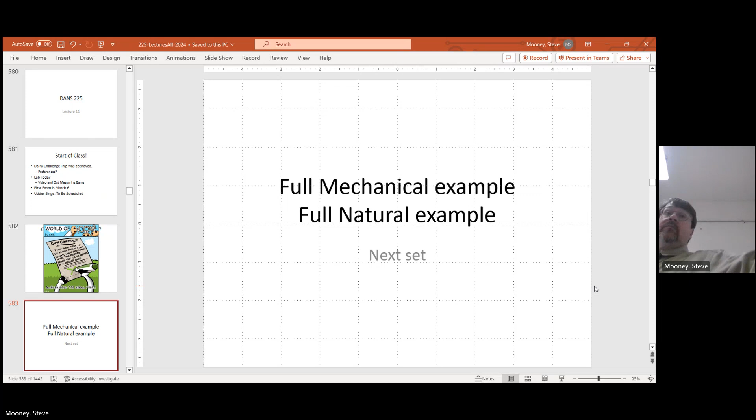So try it on your own and we'll see what we come up with. And I assume you're using your phone for calculators. If I turn it on. Yep.

Okay, we got a barn, mechanically ventilated, 100 feet long, 32 feet wide, and 8 foot high. Inside, a rectangular solid. You need to know what to do with it from there. So 100 feet long, 32 feet wide, 8 feet high. So basically steps 1, 2, 3, and 4.

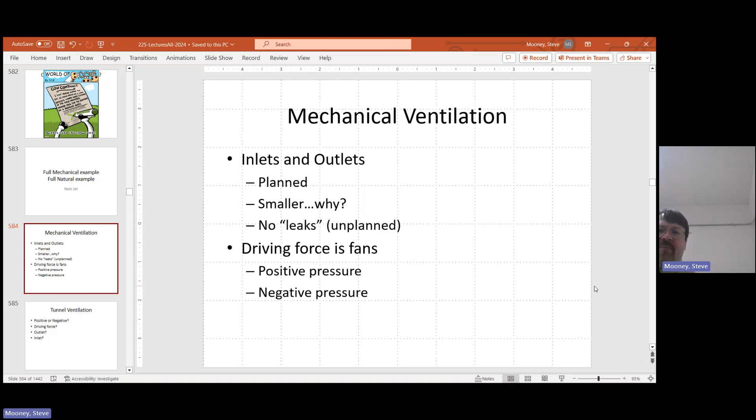So we're talking about mechanical ventilation. There's lots of different types. We start to play with things. So you got inlets and outlets. We want them planned, driving force fans. And we could either have a positive pressure system or a negative pressure system. We're gonna talk about tunnel ventilation.

Similar to cross ventilation, tunnel ventilation. Is that gonna be positive or negative? Anybody have a guess? So we're using fans to draw air all the way through the barn, starting at one end of the barn, and then drawing the air all the way through and going out the other end of the barn, usually on the long axis. So what is that gonna be? Gonna be negative. The fans are pushing air out.

Driving force is that pressure differential, the fans. So the outlet is what? Fans are the outlet. The inlet would be at the far end. And we open that up. Hopefully everything goes the way it's supposed to.

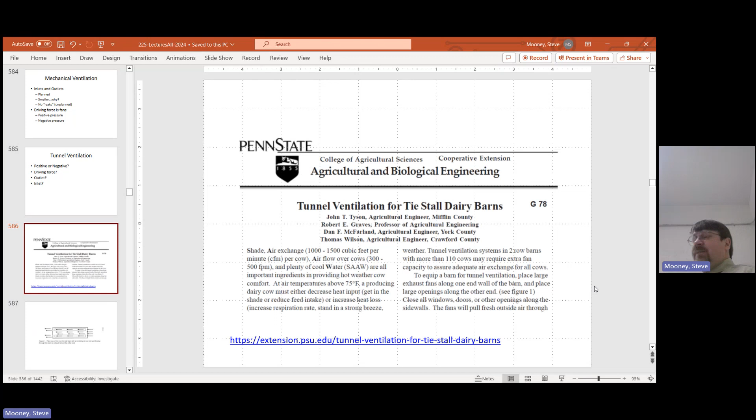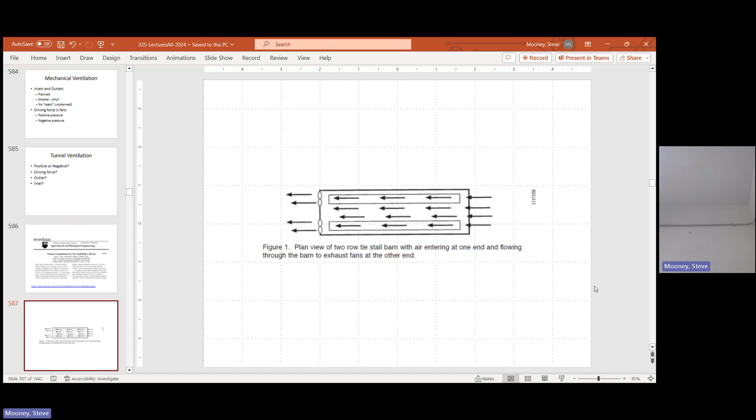You got fans on one end of the long axis of the barn. We got two fans there. They're gonna draw air from here, take the whole length and exhaust it out. So if that's gonna work, what do you have to have happen? So the straw has got to be sealed all the way down. So anybody tried to drink from a holey straw? It requires a little bit more effort. So you need a seal all the way down. And that could be a challenge, especially in older barns.

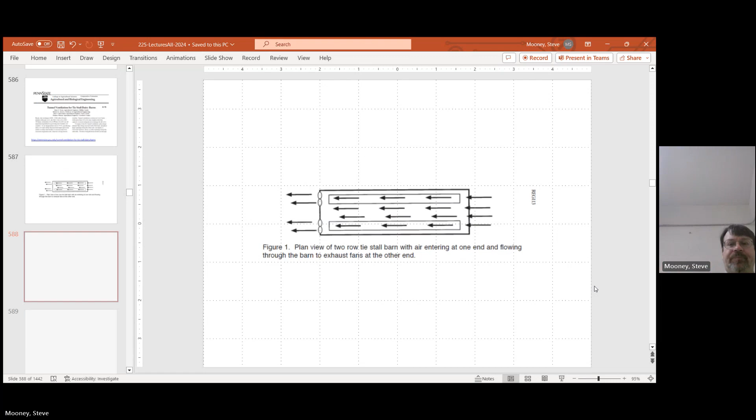So you've got the exhaust fans, especially down south, you've got lots of them. You've got some sort of inlet area, and we want that inlet area to be dispersed across the whole barn, so the air for the entire barn moves. We don't have any dead spots. If we focus the inlet just to the middle, we get dead spots in the corners. We want the whole inlet to kind of sweep through and get to those exhaust fans at the other end.

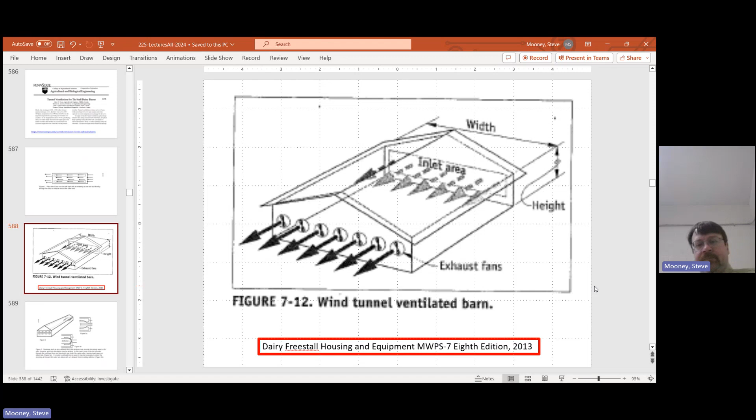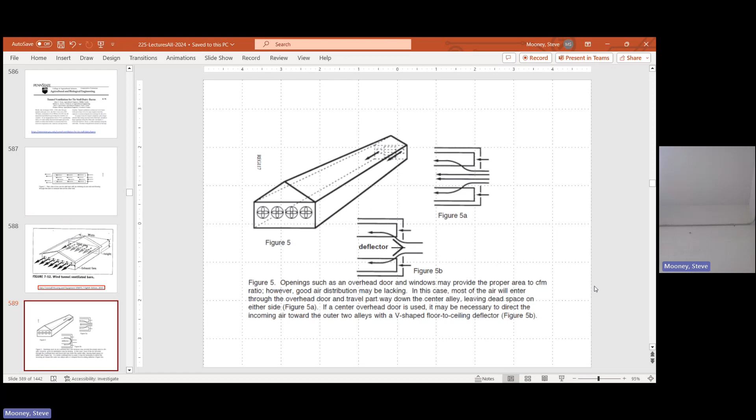So what happens if we've got some sort of building where we can't spread those inlets around the whole end of the barn? Maybe we got cinder blocks or something on an older barn and we can't really get rid of them or open them up as easily as we might a wood structure. So we need some sort of deflector to move air here.

Our main opening is here. We've got a little opening. Most of the air is going to come in, and you're going to potentially have dead spots in the corner. You're going to have a lot of air down the alleyway. You want, at least in the barn I grew up with, the rows the cows were facing out, we want some air going across their noses, so they're breathing fresh air if we can. So thinking about where those inlets are and designing a system that's going to allow that air to move.

Air is always going to run the shortest distance it can. By adding some sort of deflector, we can push that air out over the cows and not just ventilate the alleyway behind the cows. So once that air gets moving in a direction, it should go the shortest route.

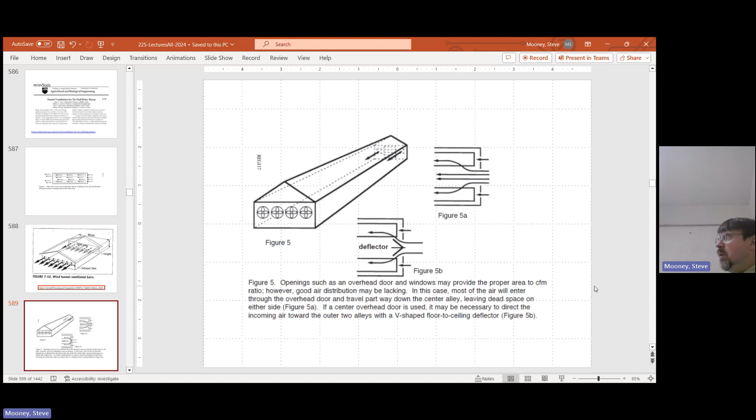So, retrofitting tunnel ventilation, the challenge becomes if you've got a barn that's got something built at the end of the barn: you've got silos or a silo room, or you've got a barn cleaner room, or you're up against a dirt mound or something like that. What happens if we can't bring in air just at the end? So we can't for whatever reason, so we have to bring it in the side.

If we just use those side openings and just let the air flow where it is, that triangle there is that dead air space. Now, there's probably no animals there, and that's probably not a bad thing. But depending on what we're doing, we might be able to modify some things. So creating a tunnel or moving the air in kind of a tunnel or a box to the center before it's released. So spreading it out, moving things around, trying to minimize that dead space. Again, it might not be too critical if it's just their butts. The air, especially for those animals on the end there, is going to be pretty extensive.

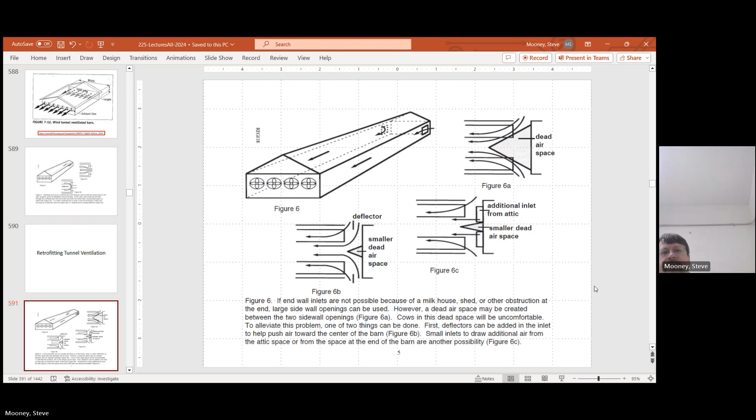So what happens if we have some sort of stone wall barn or cinder block barn and we can't put holes through? We can take advantage of these unused hay mows. Since everybody's going to haylage, we're not putting in as many small squares up. Is there an opportunity with the wood structure up top to create an opening where the air comes in? So we're creating a box thing here. We're above that stone wall there, or cinder block wall, allowing that air to come in.

We want this to be a square from a fluid dynamic standpoint. If we just do a sloping one, we're going to reduce the cross section of that opening. So it's going to be harder, the smaller straw, to suck that air in. So this is the case where the air's coming in on the second floor, it's bringing it down, and then it's running the length of the barn, and it's going out again on the second floor. So what's the challenge with that?

The ones on the ends, the air's going up toward the end, so for the ones on the end there might be dead spaces down low in these corners. So we may have to bring that air down a little bit or reduce that opening a little bit so we get those corners taken care of.

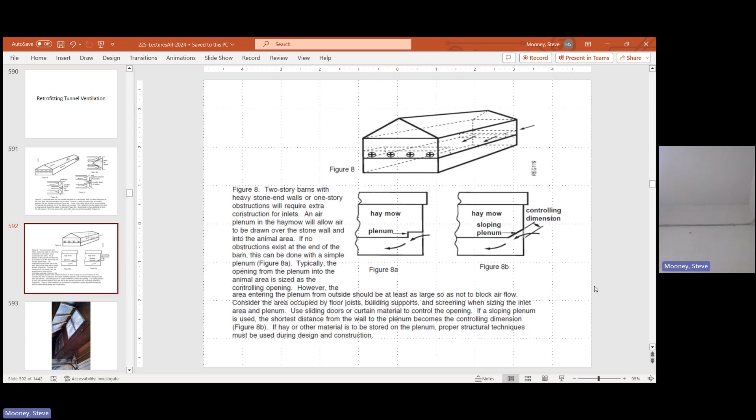So this is a barn doing that. So you've got that opening there. Above the garage door, you've got cinder block walls. It's easier to create the inlet on the second floor than it was to worry about busting out that end wall, which is full of structural support.

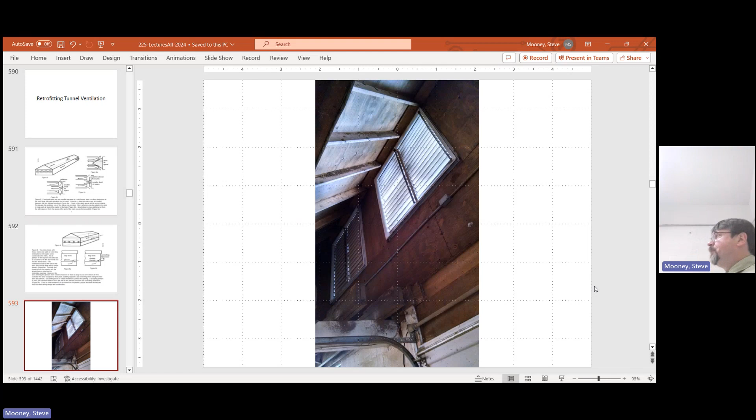So both ends, we want that square construction there, the plenum, to get the full movement of air. If we've got that angle there, especially if it's right next to the fan, this is going to be a starved area. We might only get half the use of the fan at full capacity.

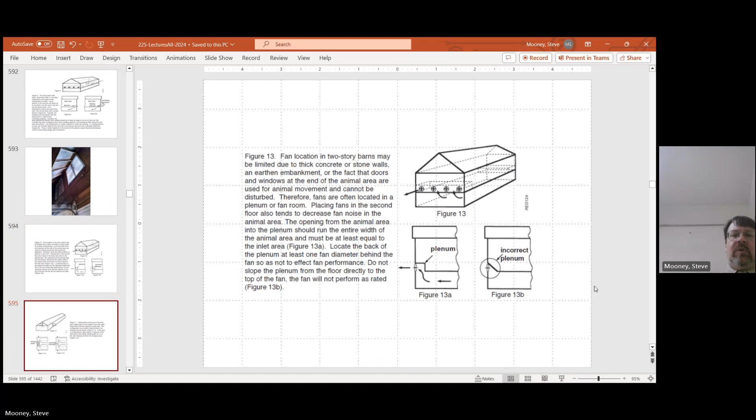What happens if we've got a milk house at the other end of the barn? And for whatever reason, the other end's blocked. How do we get air out? How do we use our fans to pull stuff through? So, natural tendency, if we've got fans on either side, it's going to short circuit to the side. We get a dead space in there. One way around it is a small inlet coming in from the attic that should push that dead space out. So we've got the big openings at the other end of the barn, but just a little opening here and there can help get rid of that dead space.

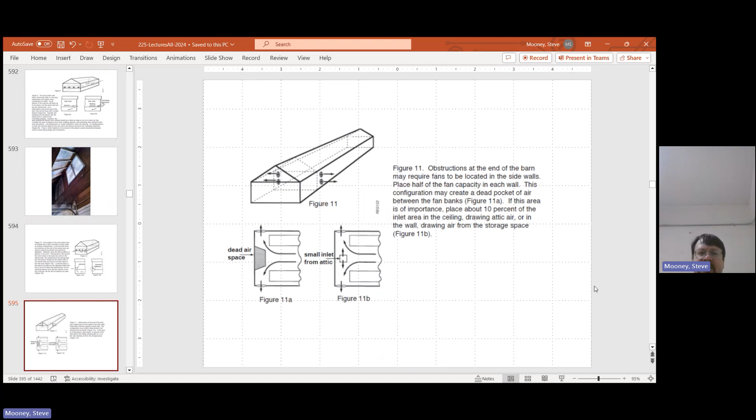This is a challenge. The barn's an L, you've got all the fans on one part of the L, and you've got your parlor right there, open in two directions. The air tends to short circuit the corners, trying to go the shortest distance it can. That potentially creates dead air down in that one corner. One way to get rid of that is to divide your inlet space. So you've got some here, and then your tunnel ventilation should work going across there.

I think the way they handle it, they don't have inlets on that corner because they have box stalls down there, is they put a whole bunch of fans on the outside. Downside of that is holes are generally less expensive from an electricity standpoint than fans.

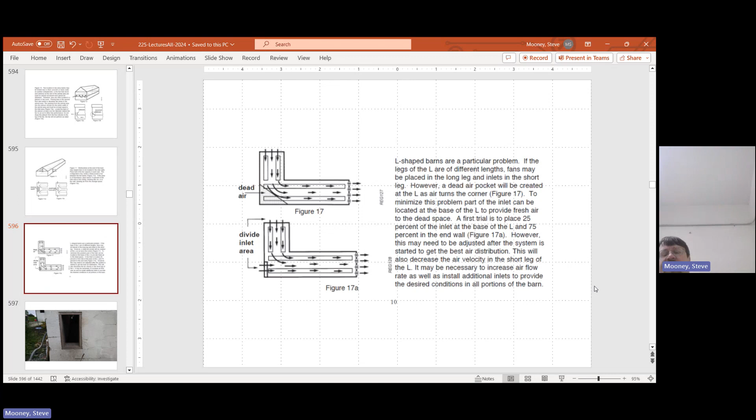So if you're thinking about going around the corner or an L-shaped barn, there's a couple different ways to think about it. So this was a barn just outside Syracuse, an L-shaped barn, you got a barn wing going out this way to the barn cleaner, and then another wing going down to the bulk of the cows. So the far end of the building from here is where all the fans are. They're up on the second story, pulling air out.

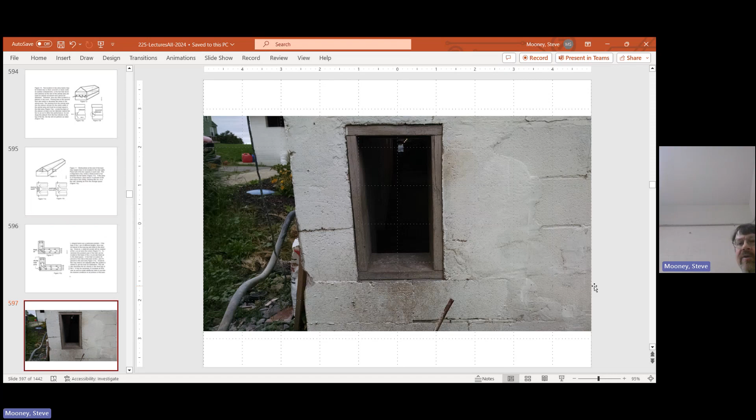They've got inlets on this end, and then they created these inlets pretty small, about 2 by 3, for the front of the cows. So you have a flow of air in the summertime in front of the cows on this side of the barn. So putting that opening in, if you're thinking about that L-shaped barn, how might we most effectively ventilate? Instead of trying to go around the corner, what might we do?

2 tunnels. So where would we put those 2 tunnels? This way and this way. So we had a student here a while back who had a dry cow barn like this, and it needed to be ventilated. It was a dungeon. So it became a special remote project. Suggestions how to ventilate it.

So if we're thinking about it, we might put fans on both ends and pull out that way. So where does this put the inlets? So down here. So hopefully we go in, hopefully we go out. This becomes the challenge or potential dead spot. Another approach is ventilating off the corner. So we're pulling 2 arms together to one exhaust system. So tunneling from 2 entrances to one area of exit.

The challenge on this particular farm was where's electricity, and if you're adding fans, that's not an easy outlet extension. You're going to need some amps there. So they had silos all on this side of the building, so exhausting was a challenge on that corner. So one of the things they did historically is trying to go around the corner.

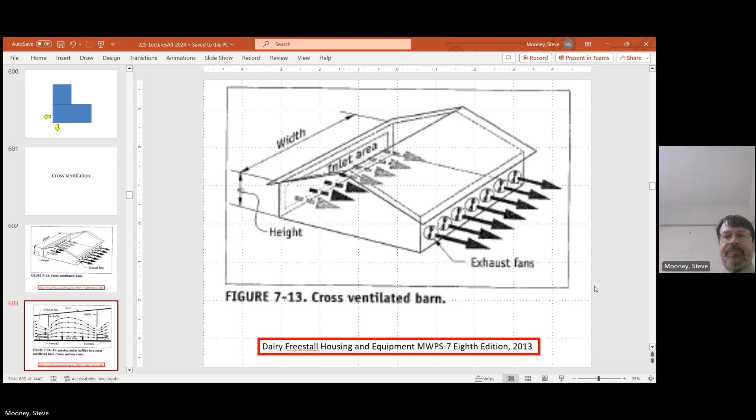So the challenge is getting the air down in some of these barns, especially if you've got a triangle opening at the top. Air is going to want to take the shortest route, the easiest route, and going through the cows is a lot of rocks in the stream. The water's going to want to go over and around. So you'll see in the video we talk about this afternoon, a lot of people will add baffles to force that air down.

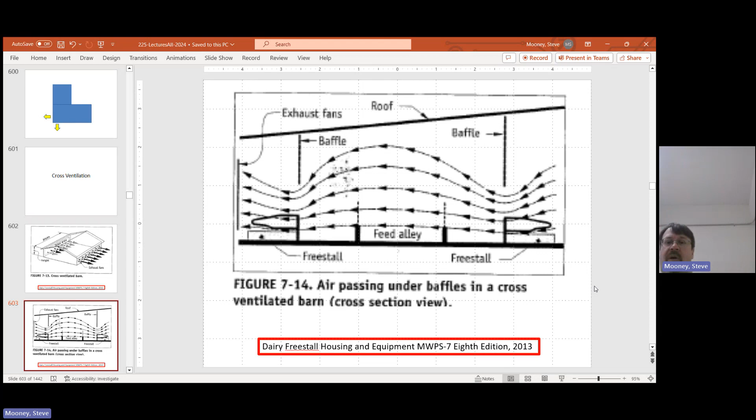So try to get the air down on the stalls as it goes across to the exhaust fans. Again, a negative pressure, try to get that down. We don't need to ventilate the alley per se, but we need to get down to the cows. So these baffles can be temporary, like curtain material, they just drop down. And we can bring them back up in the winter time. Or they can be permanent hard structures that force that air down onto the cows. So passing under the baffles becomes the challenge. So they'll talk more about that this afternoon.

This is where I grew up. We used to dairy. So it's a tunnel barn. You've got 1, 2, 3, 4, 5 4-foot fans there. So it pulls the length of the barn. The barn's about 8 feet high, 30 feet wide, and 200 feet long, 46 stalls on each side, 92 fills the barn.

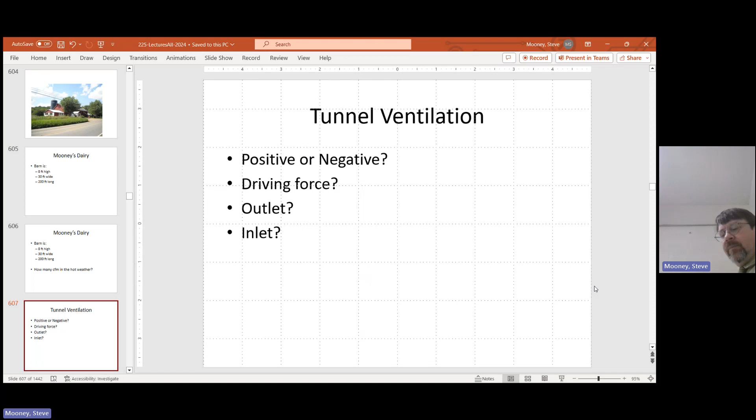So tunnel ventilation, cross ventilation, negative pressure: fans are the driving force. Outlets are the fans, inlets are hopefully planned. So they bring in air at all the points necessary to make sure that there are no dead spots, that there's a flow of air, a wall of air going down through the barn. So how many does it take to get it done? We did that already. So there's the 5 fans.

Another way to deal with a leaky barn is a positive pressure system, pushing the air in and then letting it bleed out through the holes. Yeah, you need some plan, but using those leaks, especially in a calf barn, a positive pressure system is probably more efficient in moving air out, especially in leaky barns, especially the ones built around the middle of the last century, which tend to be pretty leaky.

So positive pressure systems, what do we know about those? Maybe open ends. The outlets don't have to be all at the opposite end of the fans, as long as you got them spaced out. There was a nice system at Michigan State where they had basically quadrants, fans pulling out of 4 quadrants, and they had inlets and outlets spaced all around the barn. So that was always a nice barn to be in in the summer. I don't think I'd want to pay the electric bill, but so positive pressure, we're pushing air in. So the inlet is what?

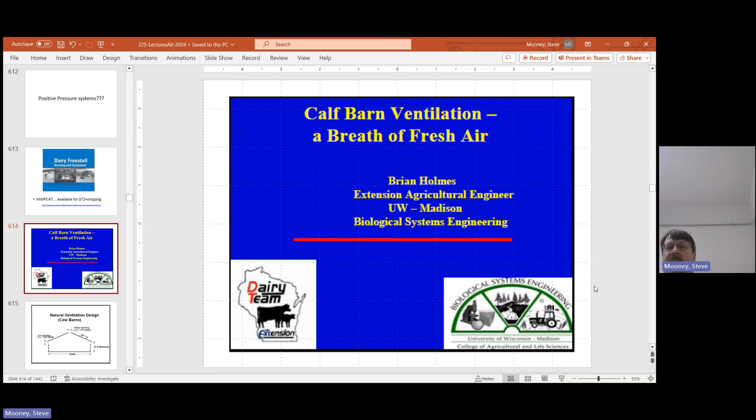So thinking about a positive pressure system, this is where we usually use positive pressures in calf barns. So we have a breath of fresh air. Anytime somebody does a presentation on ventilation, they usually go with that cliche breath of fresh air. So this is from University of Wisconsin, Madison.

So we're dealing with natural ventilation. We either have the wind driving it, or we've got enough cows in there that are going to generate enough heat that are going to move that air out. We don't usually get that with calves. And if we're doing natural ventilation, we've got a whole lot more volume that we need to have. As you'll see with our naturally ventilated barns, we need this height on the sides, as we mentioned at the end of class, to allow for that opening to be big enough to move 1 mile an hour through the barn and fully ventilate it.

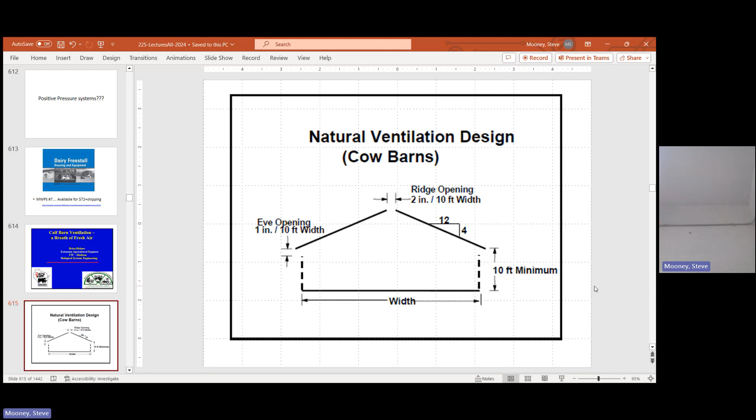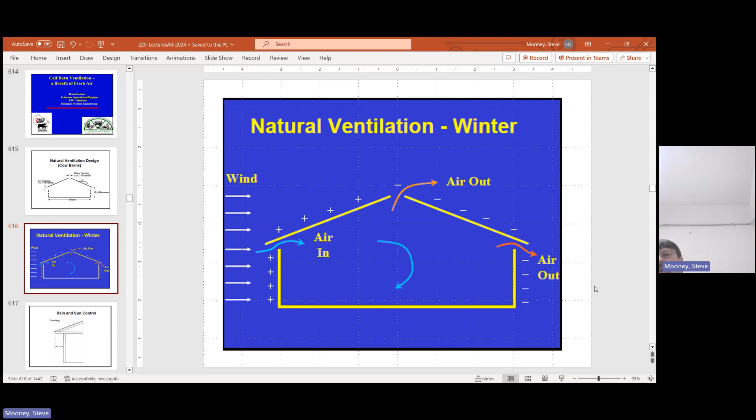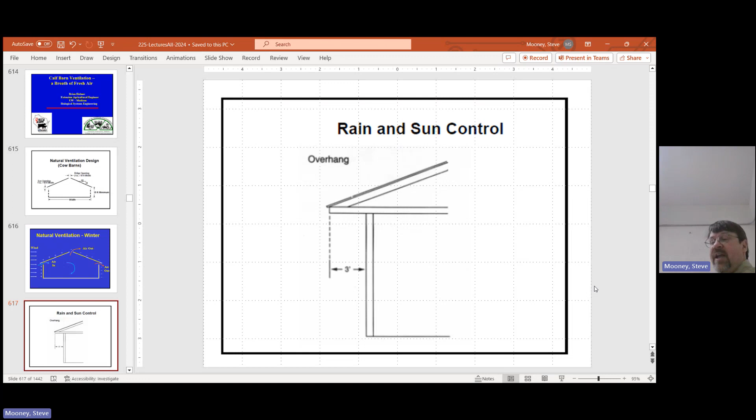So air comes in based on wind. It's going to go out the other spots. So you've got the high pressure on the wind side, pushing that air out to the low pressure on the other side. Rain and snow, or rain and sun control, having some overhangs makes a difference. So what do we know about our stalls up at the dairy when things start to warm up? On a nice sunny day. They don't use those outside stalls on the west side of the barn. They're too hot. So for a couple hours a day, we are way overstocked. Those are no longer desirable there, so having some overhang keeps the rain from splashing in their face and potentially keeps some of the sun out.

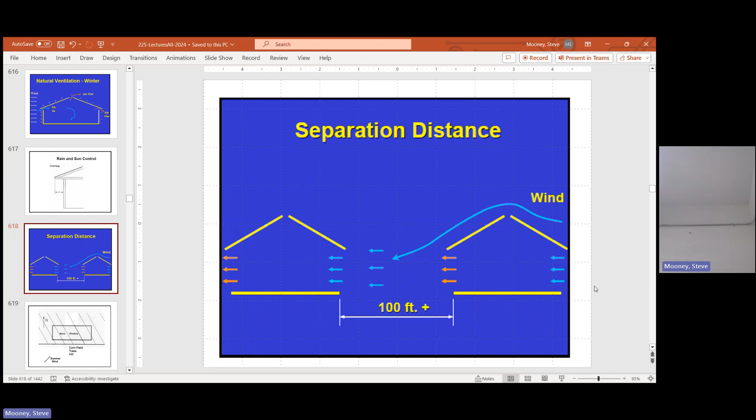When we're putting together ventilation systems, we've got to consider the separation if they're going to be naturally ventilated. If we put these buildings too close together, what happens? It's going to skip over the next barn and we're not going to ventilate it at all. So we have to have enough space where the wind is going to come down and enter that barn. So that's one of the reasons that naturally ventilated barns are spaced farther apart. Not just because we like to exercise our cows, but we need to get that ventilation down. You've got to get the next barn out of what's called the wind shadow.

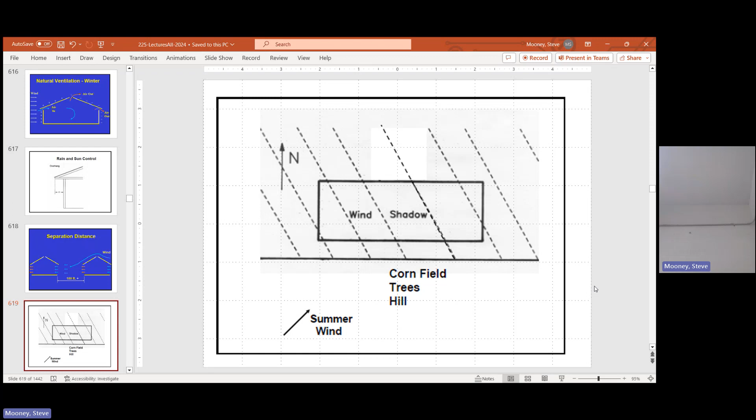So figuring that out, where your shadows are, where your prevailing winds are, can we take advantage of them? So we've got that summer wind, places you can count on wind coming from specific directions at specific times of the year, making sure our buildings are far enough apart to make sure that we can get wind there. The problem with calves is if you've got a big barn there, they're probably not going to ventilate in a way that's going to keep the calves healthy, especially in the fall and the spring. Like what we're dealing with right now, Saturday was what, 10 degrees to start the day, it was 50 degrees by the end of the day.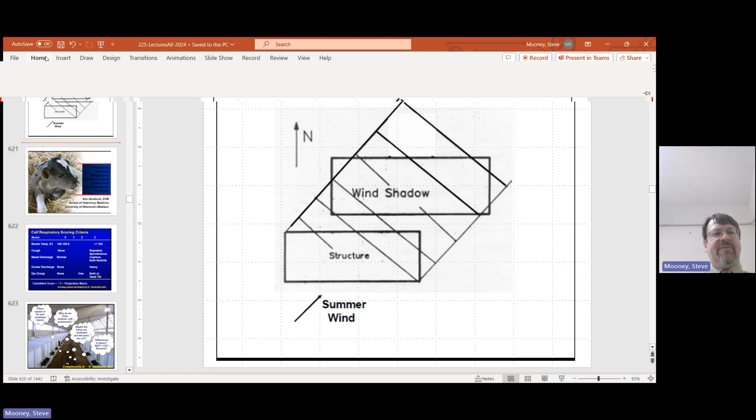So coming up with a system that's going to help keep these calves healthy, we have to go to some sort of mechanical system in the winter time, and we usually go with a positively ventilated system, which we'll see in lab in an hour and 10 minutes. So we'll see you up there. We'll talk more about the principles of naturally ventilated systems or mechanically ventilated positive pressure systems for calves on Wednesday.